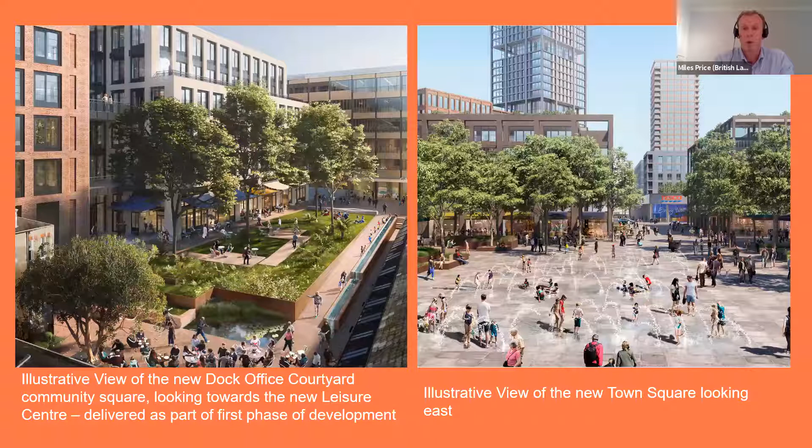On the right hand side, you see an image of the town square. This also shows the location of the new Tesco's store, just to the north of the image. That is a replacement for the existing Tesco's store, which sits in the Surrey Quays Shopping Centre today, on the other side of Surrey Quays Road, in the leisure park site as we know it.

The last 12 months or so has been really busy. Nearly a year to the day, we got our planning permission issued by Southwark Council on the 29th of May, and since then we've been very busy. We've drawn down the 500-year head lease of the master plan site from Southwark Council.

You'll have seen, because of the activity on site, that we started the enabling works and preparatory construction works, and we're apologetic for the disruption that is causing. We know some of our neighbours are more affected than others, and we're doing what we can to minimise that impact through the course of the works. We'll be happy to talk to you if you're directly affected, and we have people you can speak to so we can address your concerns.

We're also aware that for existing shoppers and users of the leisure park site, some of these works may be disruptive, and your arrival experience when shopping at Surrey Quays Shopping Centre will change. We'll try our best to make the signage and routes from the surrounding streets into the car park as easy, intuitive and legible as possible, because we don't want to affect your shopping experience. We're keen to retain you as customers, and for your local shopping centre to remain the place you want to come to shop.

My name's Hugh Sowerby, and I've been advising with Alice on the master plan for probably 5+ years now, so we know it quite well, and I know a number of you on the call.

Just on the first slide, I'll go through what we've actually got planning permission for. After a long, prolonged period of consultation - 3+ years - we're now coming back with more consultation. The reason is we got what's referred to as a hybrid planning permission in May last year, so parts of it were in detail, meaning we provided all the details needed to ultimately build out.

You can see on the screen these are plots A1, A2 and K1 at the top left. And then the rest of the master plan area, identified in orange, was outline planning permission.

What that means is we've got permission for the general principle of what we're looking to bring forward, but we need to bring forward reserved matters applications to provide the missing information we didn't know at the time. It's no surprise, really, with a scheme that's going to be developed over 10 to 15 years, that British Land didn't know exactly how it was going to be built out - hence the inherent flexibility in this hybrid permission.

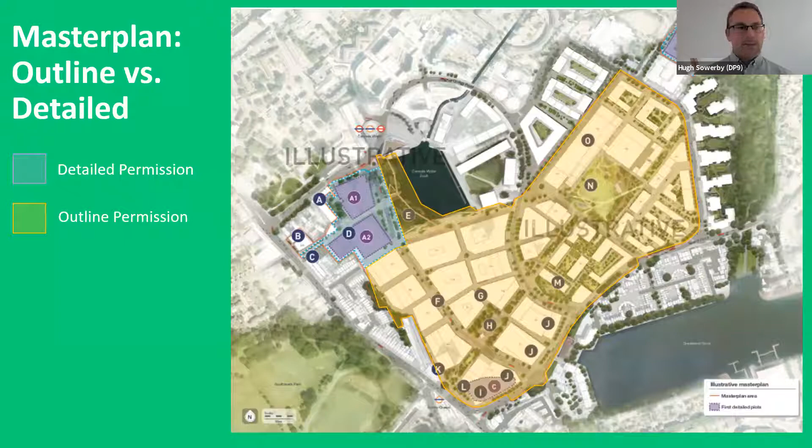So going through the description of development - this is what's on the decision notice for the master plan. There are 4 elements to it. The one highlighted in yellow at the moment is what we've got outline permission for, and you'll see there isn't a huge amount of detail there.

What it says is we have outline permission with all matters reserved for a number of buildings, which could bring forward a number of different uses. And we have permission to demolish all of the buildings on site, or indeed retain some of those buildings. That's the outline element.

And then the next parts are the detailed elements, and you'll see there's a lot more information in that description. So A1, we know it's going to be 186 new homes, and we know it's going to be 6 stories and 34 stories - you can see the image there on the right.

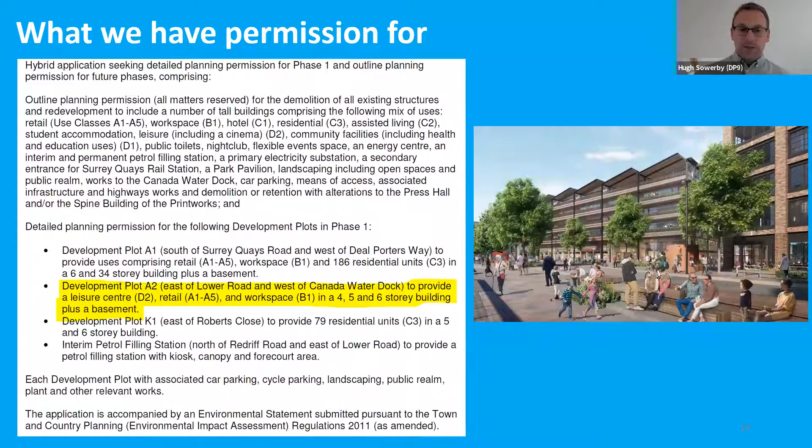Similarly with A2, we know it's a 4, 5 and 6 story block. We know it's delivering a new public leisure centre, and we know it's going to be providing retail and office uses. And then K1 is the detailed plot near Roberts Close, delivering 79 residential units.

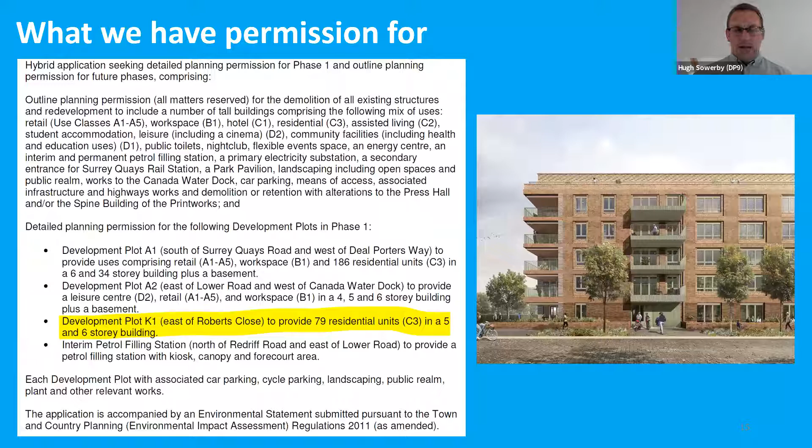So ultimately, each reserved matters application we make will be turning the outline description of development into a more detailed description of development. I haven't got an image of the interim petrol station, but if you pop down to site, you'll see it because it's due to open next week, I believe.

Now, as part of the outline element of the planning permission, there are a number of control documents. What these do is set the rules for development and for the reserved matters as and when we submit them. The purpose is for the council to assess our scheme against these control documents to make sure we're not doing anything outside of the parameters we've already agreed.

I've got examples of each of the 3, but we've got a development specification. In very simple terms, that provides a limit on the square meters of development that we can deliver on the site - the square meters of gross external area of development.

And we can't go above that hard cap. The parameter plans are as they sound - they are plans that set out limits of deviation and areas within the site that we can develop.

The design guidelines, both for the master plan and for the public realm, form a very large document which sets out all the rules of how the buildings should come forward in terms of appearance and important elements - anything we thought was important, anything the council thought was important, and anything not included in policy found its way into these design guidelines. They were subject to a huge amount of discussion with officers as part of the application process, and also detailed public consultation.

So I'm going to take you through a couple of examples of the parameter plans. The first one is the site plan. The area outlined in red is the area to which we have planning permission. You can just see the area in blue - that's the existing dock offices, which isn't part of our outline permission, but it is owned by British Land.

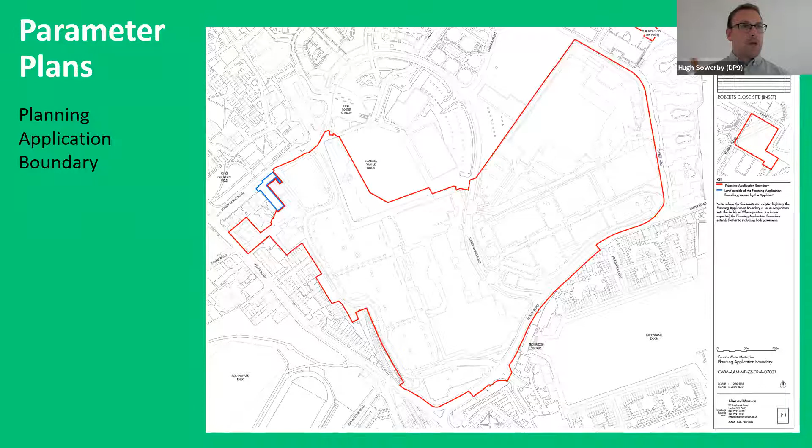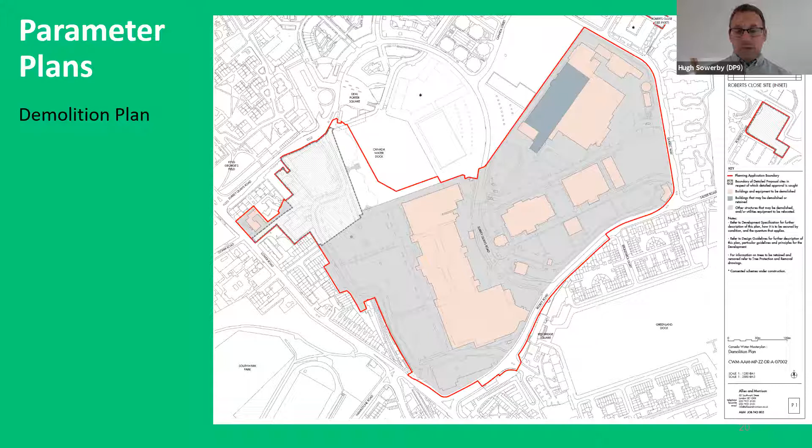This plan simply says that we can demolish everything on site. We have permission to demolish all of the buildings, but you'll see the one in darker grey at the top - we have permission to either retain that building or demolish it, depending on what British Land decide to do moving forward. This is probably one of the most important plans.

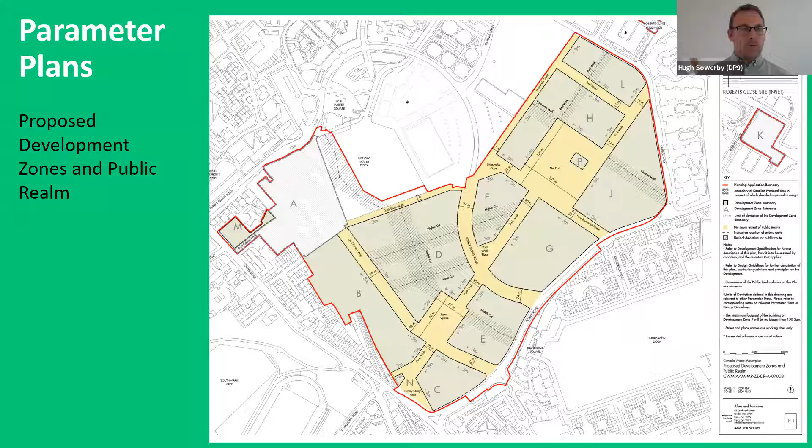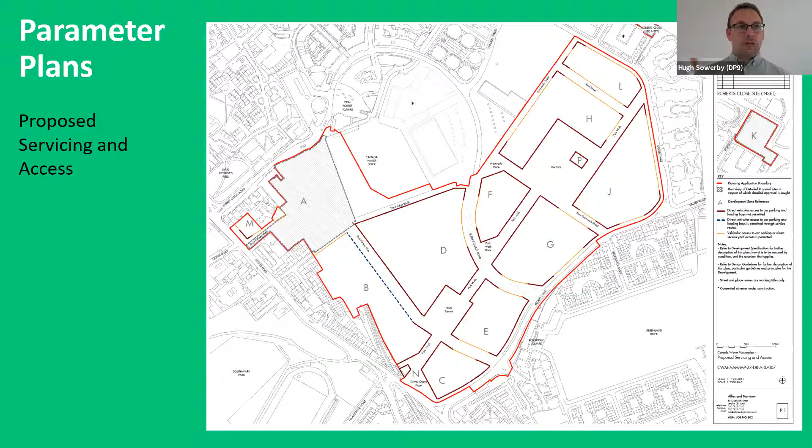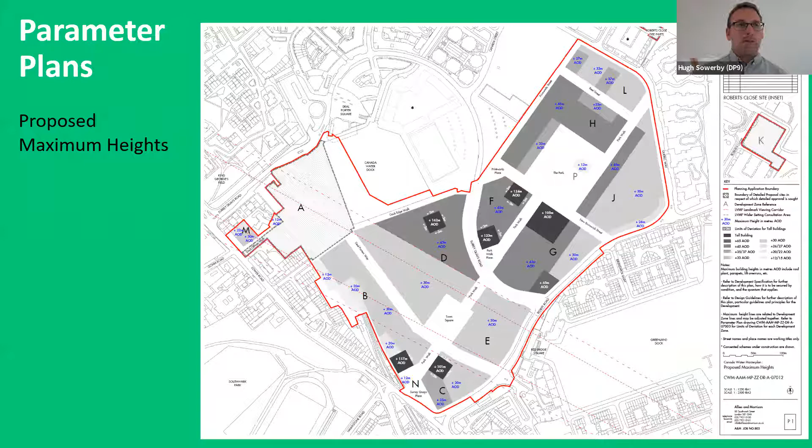This is probably the other key plan, which sets out the heights across the master plan. As a broad summary, the darker the colour, the higher we can go, and there are written dimensions on this plan as well. You can see a number of very small dark squares, which are our tall buildings, but there's a very limited amount of deviation within that box - so that's where we know the tall buildings will go.

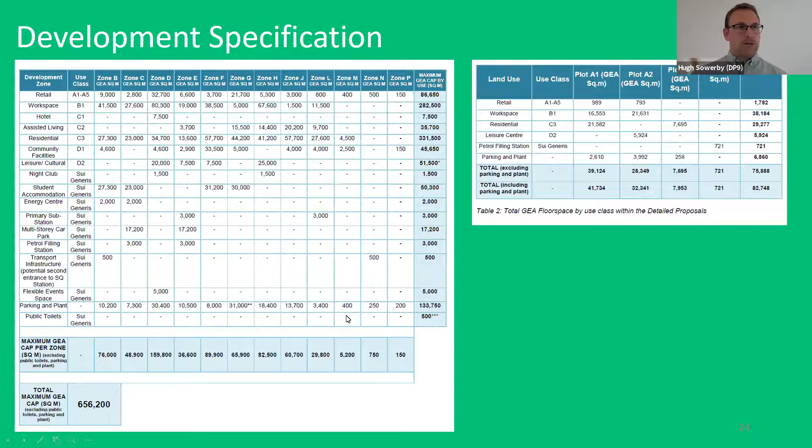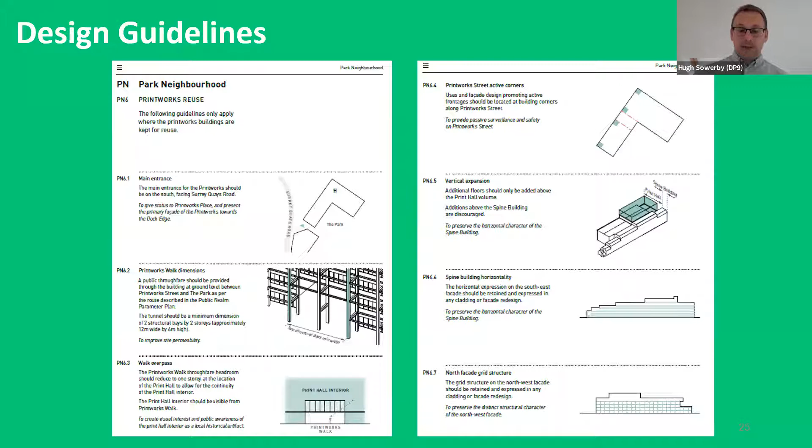So they're quite detailed, important points, but these will become more relevant as we bring forward a reserved matters application for a particular site.

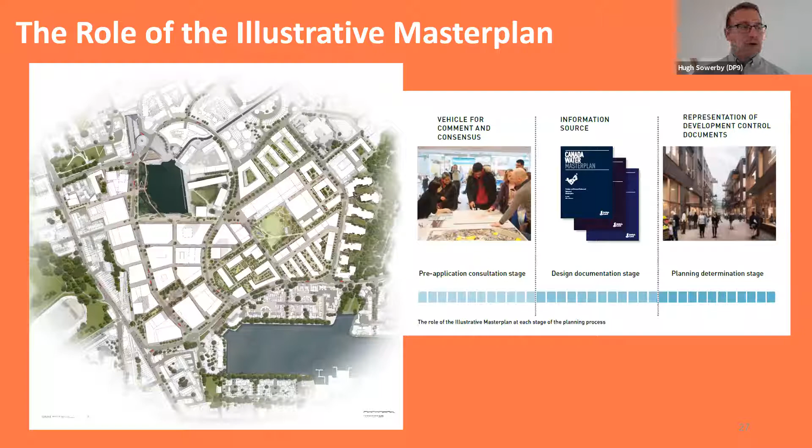However, when you bring in the development specification, which caps the amount of area to 650,000 square metres, the actual area within this jelly mould is almost twice that. So we cannot deliver buildings to this full jelly mould. So the Illustrative Master Plan takes that area, takes all of the briefs, all of the visions, all of the parameter plans, all of the design codes, and comes up with what we think is one interpretation of what could come forward.

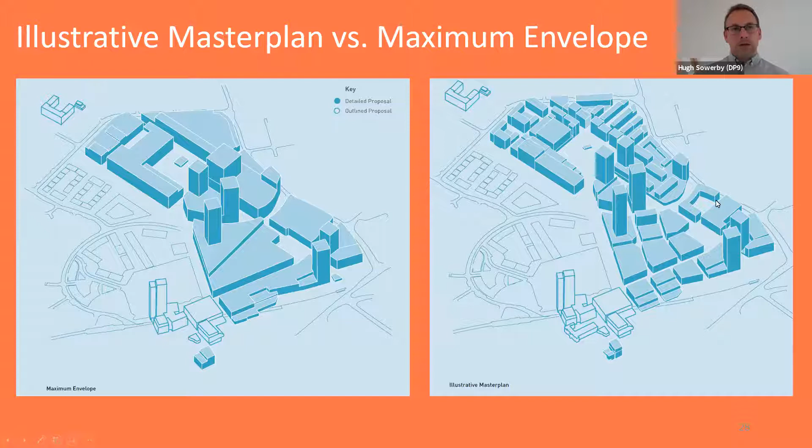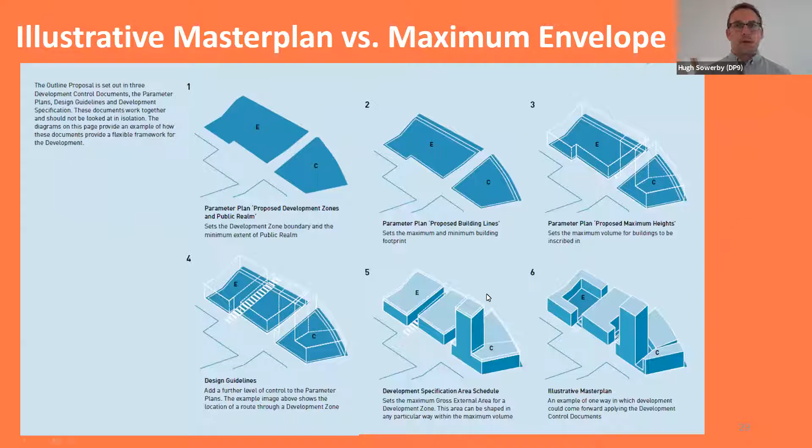I'm now going to hand over to my colleague Alice, who's going to go through what the reserved matters applications are.

Good evening, everyone. So Hugh's talked you through what has already been secured under the outline permission. I'm going to briefly explain what the reserved matters are. Next slide, please.

An outline permission establishes the general principles of a development, such as the scale and nature of it. But an outline permission is subject to the approval of further details, known as reserved matters. There are 5 reserved matters: layout, access, scale, appearance, and landscaping.

Reserved matters could be submitted individually, or all together. So you might see an application which includes details for any one of the reserved matters, or all 5, or anything in between. But a scheme can only be built out once all 5 reserved matters are approved and any relevant conditions are discharged. Our reserved matters applications will need to cover all parts of the site, including buildings, public realm, and infrastructure such as roads.

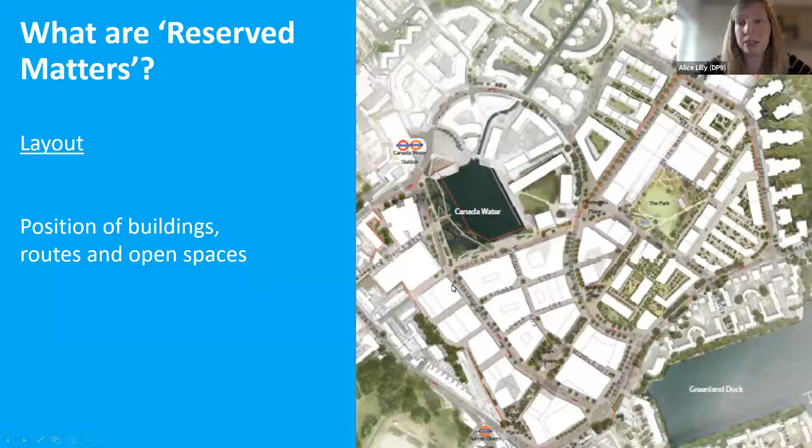The first reserved matter, layout: an outline permission secures approval for development zones rather than the individual buildings themselves. So we will need to come forward with details of layout, which includes how each individual building within a development zone is arranged around the network of streets and spaces established by the outline permission.

The next reserved matter is access, which means how various users of the building or piece of public realm will access the site. This includes access for vehicles, for example servicing and delivery vehicles or refuse vehicles or residents' cars, as well as cyclists and pedestrians. We would need to provide details of routes into and out of the buildings or public realm and show how these routes link into the existing network of surrounding streets and spaces. We'd also need to demonstrate inclusive access, showing how those with differing mobility needs might access a space or building.

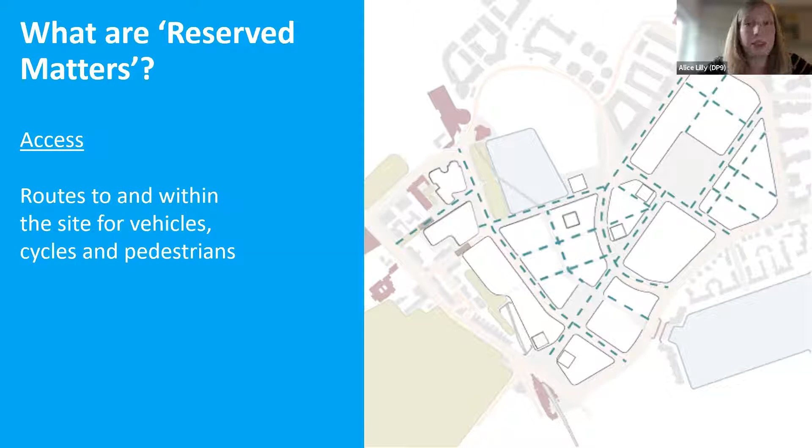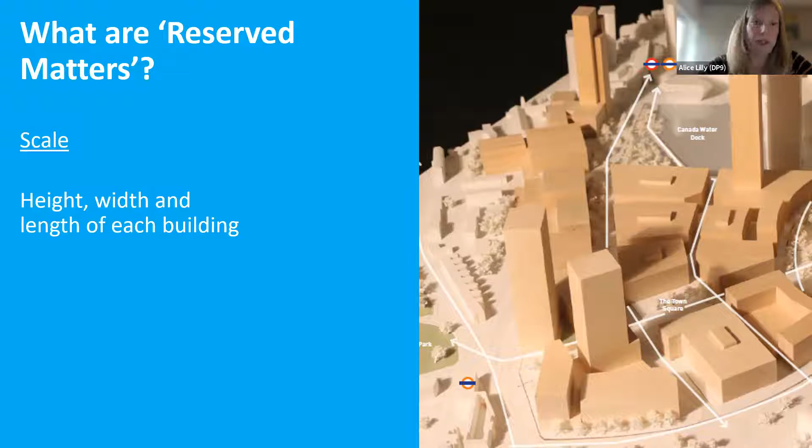Scale: under the outline permission, the maximum height and massing parameters have been established, but we would still need to come forward with details of the precise massing for each individual building. Very simply put, this is the height, width and length of each building.

Appearance is fairly self-explanatory - what's the building going to look like? This needs to include details of external facing materials, architectural detailing, and demonstrate the appearance of the building.

The final reserved matter is landscaping, again fairly self-explanatory. It's how the streets and spaces around each building will be treated. It should include details of tree planting, hard landscaping, soft landscaping, etc. I'll hand back to Hugh, who's going to talk through the reserved matters process.

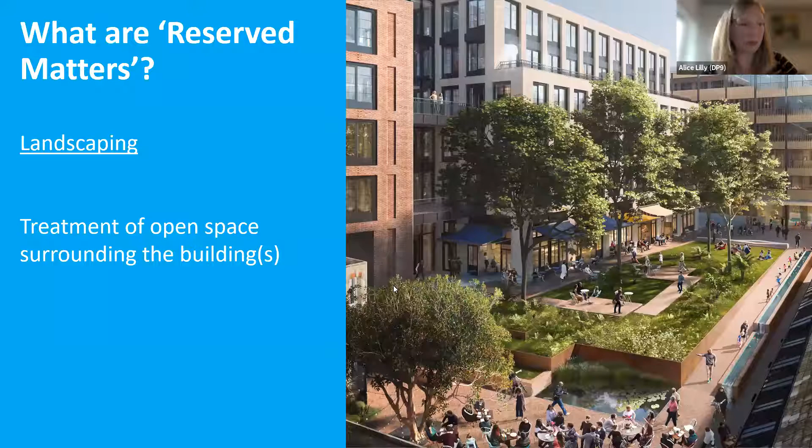The reserved matters process includes the process we'll undertake with the design team, but also the consultation process this forms part of. It's not dissimilar to the process one would undertake for a full planning permission, albeit we are working within the parameters already established with the permission, and only providing the details we now need to, that Alice has just gone through.

The start of the process is to get the architect and the design team up to speed and to set a brief and a vision for the particular plot. And then we will engage in pre-application discussions with the council.

Once we've got through a period of pre-app engagement, we'll start sharing information publicly, which will include preparing information boards and potentially holding a public exhibition or sending around a newsletter. Miles will go through that in more detail.

We'll then prepare information for submission to the council, and a reserved matters application is dealt with by the council in much the same way a full planning application is. We'll submit it, it will be validated, there will be a period of statutory public consultation. The officers will then review any consultation responses, draft their report, and the report will be considered at planning committee, which can then choose to approve or refuse the application.